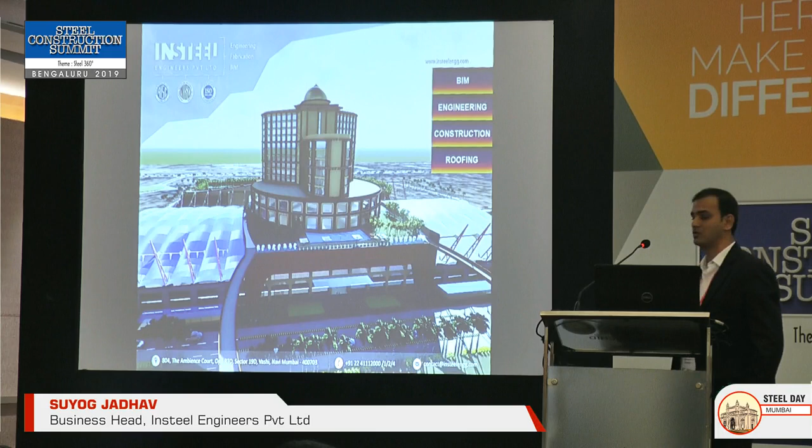To start with, I'll just give you a brief about Insteel. So we are into building information modeling, digital construction. We are into engineering, so shop drawings preparation for large projects. We also do construction, and we are also into building envelopes, like we do roofing, Kalzip roofs and polycarbonate roofs.

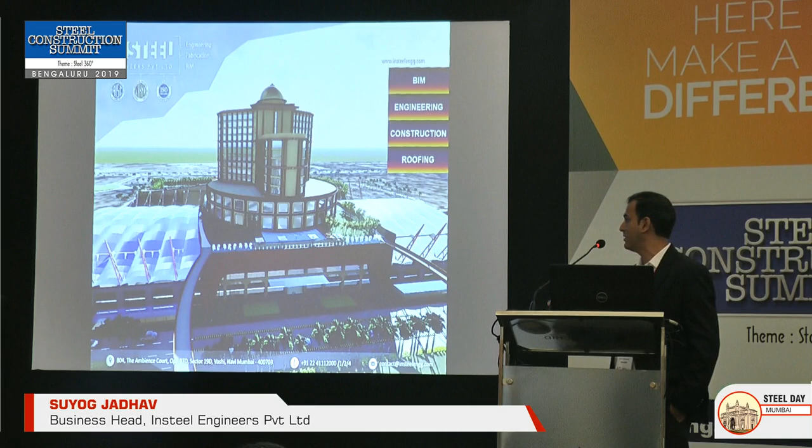The project which is being showcased over here is Gandhinagar railway station, wherein we are associated with all the stakeholders in terms of architect with the BIM. We are also doing connection design with Sterling Consultant, and we are also executing the Kalzip roofing over here for the main contractor. So typically when we start any project, we start with designing, so we do it on STAAD.Pro.

We do detailing using Tekla. We also do fabrication, we do erection. Of course, painting is also a part of process, and we also do roofing and facade. Now to also add, since we are into BIM, we do not limit ourselves to the modeling of any structure, but we integrate that model with the Primavera schedule, so that one can actually monitor sitting at his office what was planned and what is being executed at the site.

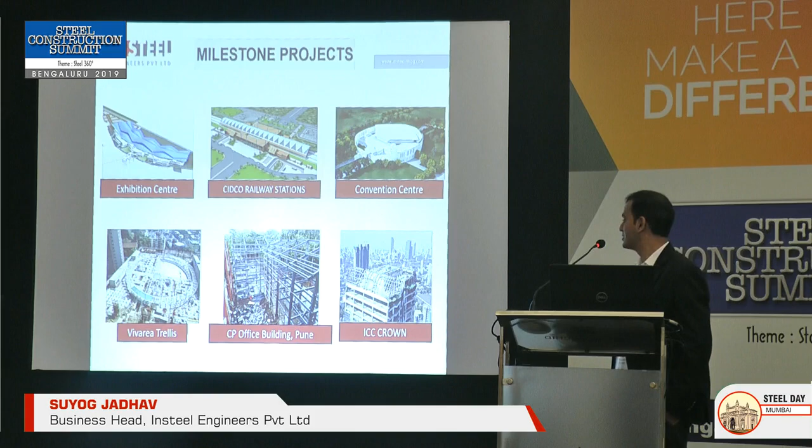Now these are some of our projects. As I told you, we are into exhibition centers, we do railway stations, we do convention centers, we do trellis, we also do small buildings, and we also do crown structures. Now I have been looking at most of the presentations, and those are all talking about high-rise buildings. I am here to tell you something different. We call ourselves architects, engineers. And why?

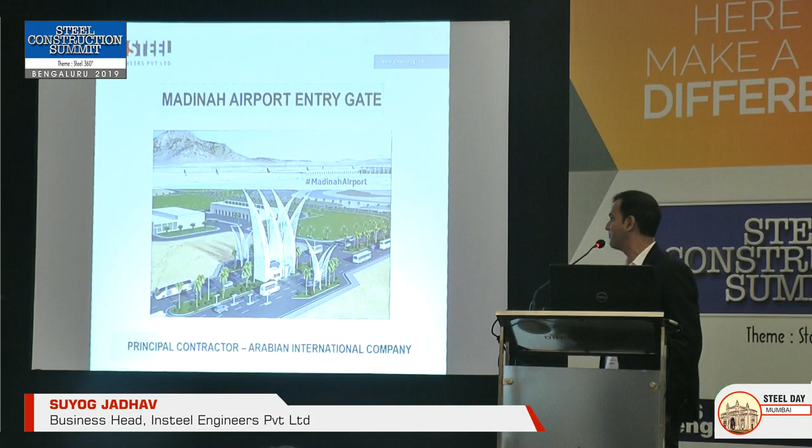Because I have been meeting various architects in Bangalore, and the common problem which has been faced by architects over here is availability of good fabricators. So just to tell you that this is one of our projects which we completed 2 years ago. It's Madinah Airport entry gate structure. We started with detailing, and I'll start with the challenges which a typical contractor faces. Now, this was an international project, and the main contractor was Arabian International Company.

So the erection was to be done by them. It was only fabrication, painting, which was done by us. So coordination between our design team and the site team, and then getting site dimensions, everything was a bit difficult. The structure is totally formed out of steel plates, S355JR grade, 25 mm thick plates, and it was all reducing members. So starting at the base, it was around 900 mm, and then going to the top, it was reducing to 100 mm.

Then all splice connections were planned because it was an overseas project, so we transported through containers of 12 meter sizes. 100% welding joints were to be tested for UT, and considering all these things, entire fabrication of around 350 metric ton was to be carried out in about 2 months. So that was quite a challenge. And another logistic challenge was also there.

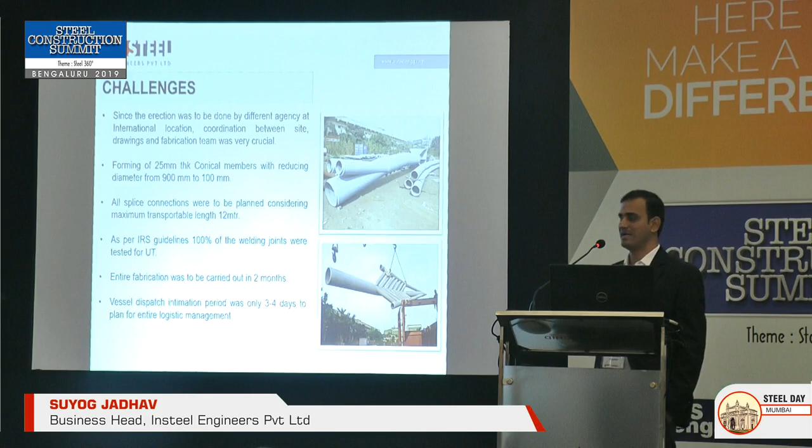So key facts about the project: it is an entry gate structure. The height of the tip is around 70 meters, around 350 metric ton of steel being used, and our scope was detailing, fabrication, surface preparation, and transportation. The grade of material what we used is S355JR for the plates, and then YST310 for the tubular pipes. It was totally prefabricated in our factory at Navi Mumbai.

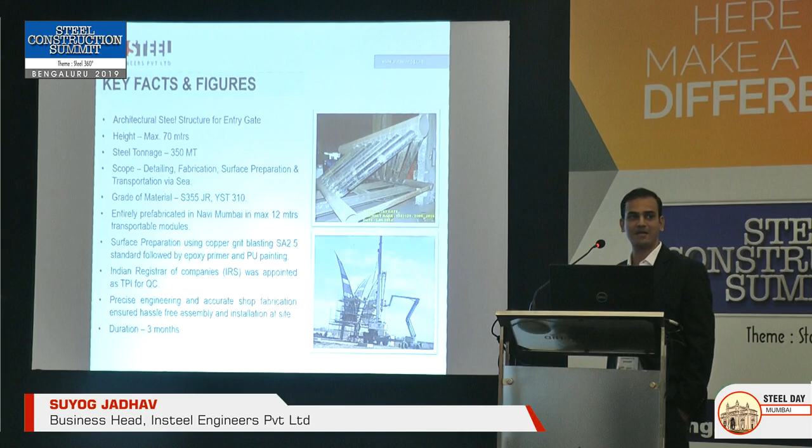And then we also did surface preparation, SA 2.5 standard copper grit blasting, followed by epoxy primer and PU painting. Then TPI was Indian Register of Companies. Being an international project, quality was of prime importance. And the advantage using Insteel was, since we were detailing also, we know what kind of engineering goes into it. And we managed to complete the structure in total 3 months, not 2 months. So 1 month was extended, but still the picture at the end was quite good.